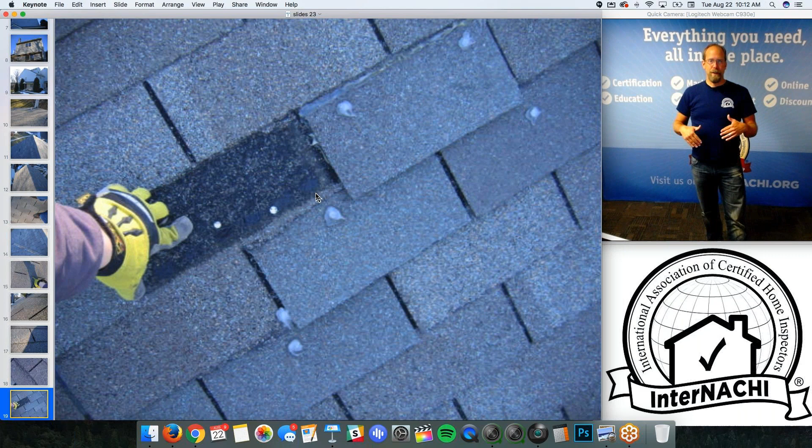As you can see, we have defects. They're not material defects. There are a couple shingles that are in poor shape, but you need a professional, so those are major defects. I'm looking for defects, and I want to make sure my client understands the degree of the defect. Material is the worst, major needs a professional, minor needs a professional or maybe you could do it, and cosmetic is like a blemish.

These are major defects, and the shingles weren't even installed correctly. As you can see in that shingle, one of those fasteners was installed poorly, they're not spaced appropriately. That's not where you install a fastener. You don't install fasteners 4 inches apart on any shingle, not even wind driven. And that fastener is installed in the adhesive strip, so that's a poor location of a fastener in a 3-tab asphalt shingle.

I like to communicate with pictures and video more than words. If you take a look at my inspection reports, you can download samples of them. My reports have a ton of pictures, because a picture is worth 1,000 words.

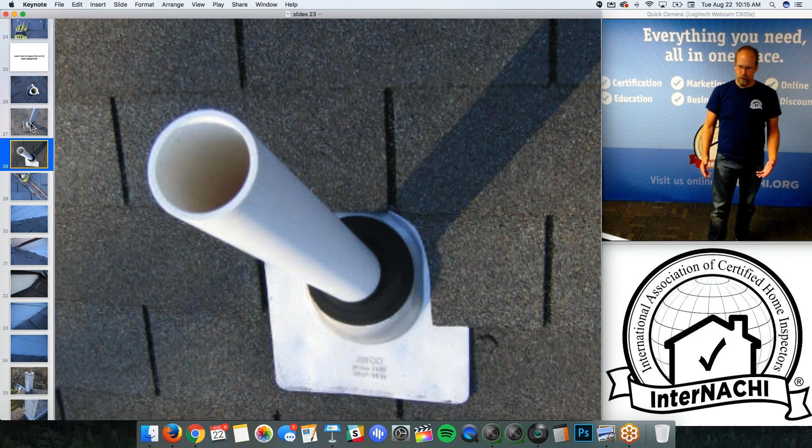So there's the penetrations, that flashing is not installed properly. If you take a look at it, the left side of the flashing jack is actually open to water penetration. There's a hole 2.5, 3 inches from that left edge of the metal flashing. Oh, I wonder if I have a pen. I've practiced this before, but usually I'm not very good at it. There it is, cool. So right there is where I'm talking about. There should be an asphalt shingle tab lying over that area, so it's not a really great position from the roofer on that flashing.

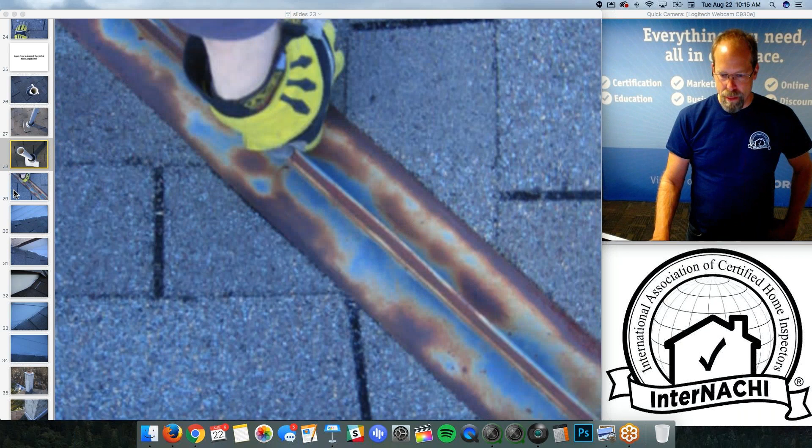The standing seam has a little bit of corrosion. I'm not worried about it.

The other type of flashing that you need to look at is flashing around the vent pipes, valley flashing, and step flashing. Step flashing is listed in the standards of practice, and you're required to inspect for it. I see step flashing, but I also see white silicone slobbered all over it. And when I see that, poor workmanship, something sloppy, I put a smile on my face. I know I've got a problem, and I want to figure it out as much as I can. I'm not required to diagnose every problem I see, but I'm going to try to figure out what's going on, because this doesn't look right.

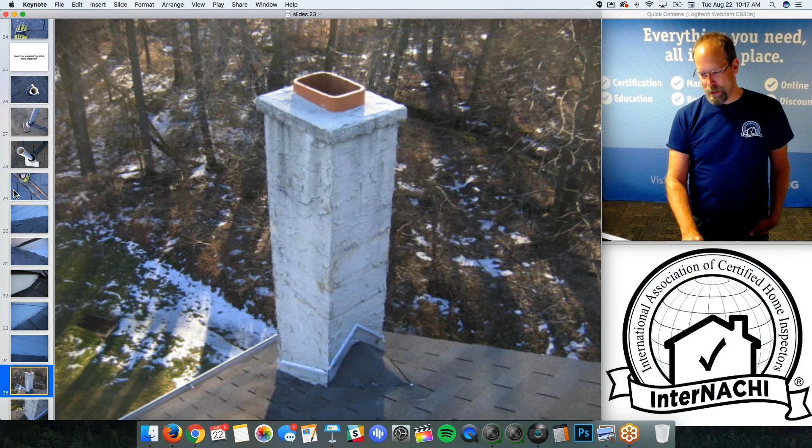So you can see the metal flashing there in between the shingle tabs, but I don't know why. If you do metal flashing properly, you don't need sealant at all. So you're probably saying, well, what about masonry? You're supposed to cut a groove into the brick masonry fireplace and bend that flashing in there and shove it in. Then you can put a little tab of silicone if you wanted to, but silicone is a temporary Band-Aid, and those things fall off all the time. So does silicone.

There's the chimney stack. You're required to inspect a chimney stack. We have a course on inspecting fireplaces and chimney stacks. I know that's a fireplace chimney stack. Can anybody take a guess why I think that's a fireplace chimney stack and not a masonry chimney stack from a fuel burning appliance, furnace, or boiler?

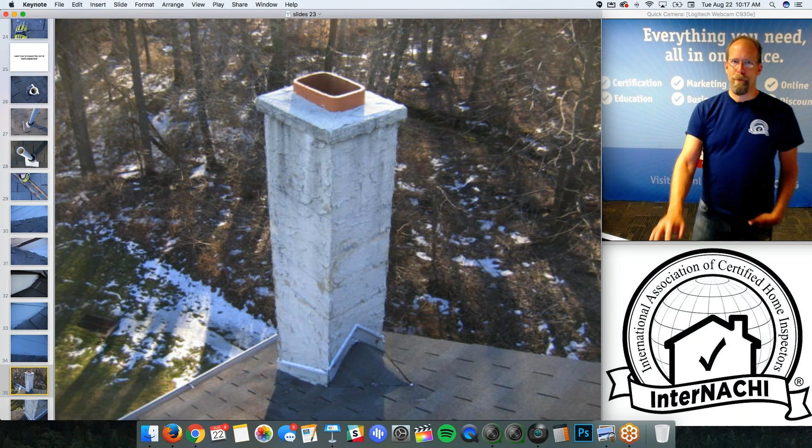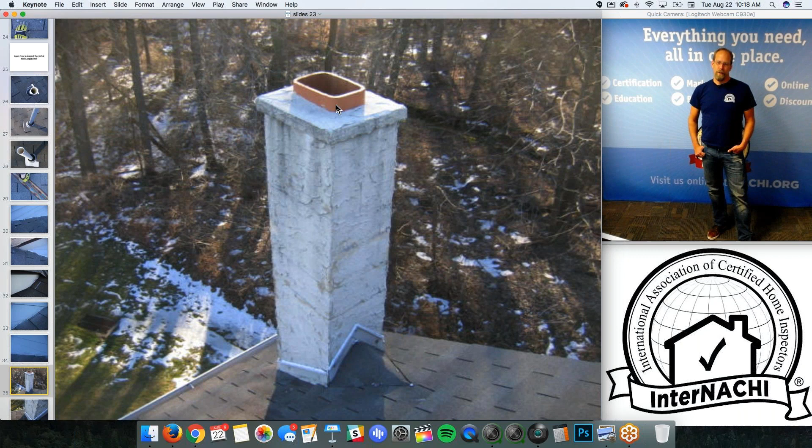Anybody guessing? Shelly says it's over 3 feet high - no. Ceramic vent? Yeah, you're close. Douglas - so the shape, it's actually the shape of the interior flue liner. The terracotta flue liner is rectangular, and that gives me a pretty good guess that this is a fireplace chimney stack, just the shape of it. If you see a rectangular flue liner on a chimney stack, it could be a fireplace. This is cold climate, so that makes sense. If it's circular or square, that could likely be a flue liner for a fuel burning appliance, a furnace, a heating system. Just one of those tricks - it's in the course as well.

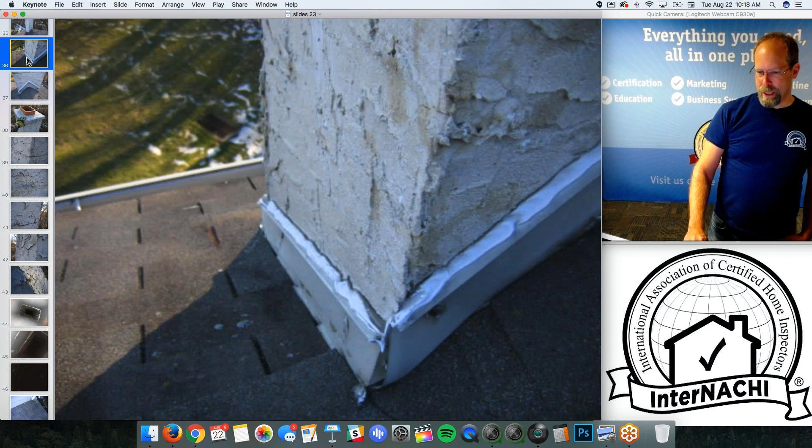The flashing is okay, but I'm not happy again with the white silicone - doesn't even look very good. The wash or top cap on the chimney should be sloped. If it's metal, it should be sloped with a drip edge to kick water away. There's some cracking of the masonry at the top wash, the crown, and also cracking at the mortar joints. I'm assuming this isn't brick because the cracks are about 8 to 9 inches apart, so this is probably a concrete block chimney stack, with cracks at the mortar joints and efflorescence at each crack.

There's also chunks of masonry popping out. What happens is this masonry is absorbing moisture through the cracks or through the material itself, and through water pressure, it's cracking the masonry on the outer surface - or because of the cold climate, it could be freezing and cracking. Either way, it's a clear indication of water penetration into the material, with efflorescence or salt deposits being left behind and causing structural damage. So this is a major defect.

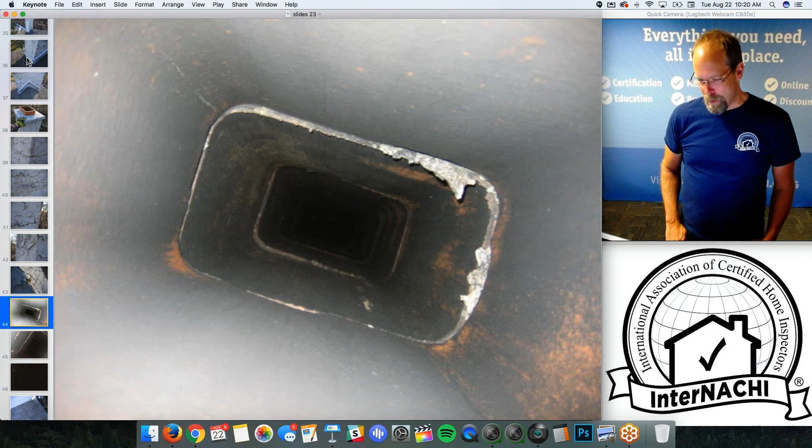The interior flue liner - you're not required, according to the standards of practice, to inspect any interior flue liner. But while I'm there, I can just reach up, grab my digital camera, and snap a shot. Often I find a hole right on the side of the interior flue, or maybe there's a separation or a vertical crack or a blockage. This one's fairly clean, I don't even see any soot or creosote. And I try to zoom down to look at the damper or the throat of the fireplace.

So what I did was I took a bunch of pictures of the roof, usually about 50 pictures just of the roof. If there's a lot of defects, a lot more pictures. For this roof, we had some major problems - some shingles are cracking, and issues in the chimney stack and the flashing. So I'm taking about 50 pictures, I'll put maybe a dozen or so of them in the inspection report. I won't be able to put them all in.

I'll also do video. I used to carry two cameras - now I have software that I use with my iPhone. It takes pictures and video. I would take video of the roof inspection because I don't want anybody coming up on the roof, but I wanted to communicate my findings really well. So I would take video, and here's video of the roof.

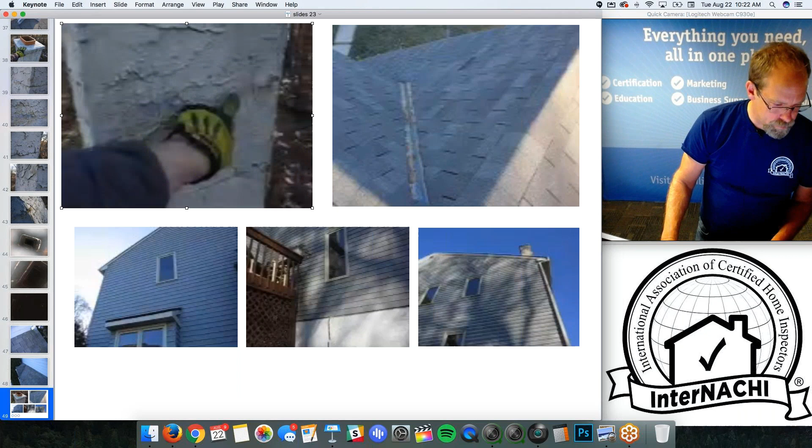There's the chimney stack - the masonry chimney stack needs some repair at the mortar joints. The stucco exterior, cement stucco, is cracking along all of the mortar joints. That could allow water penetration.

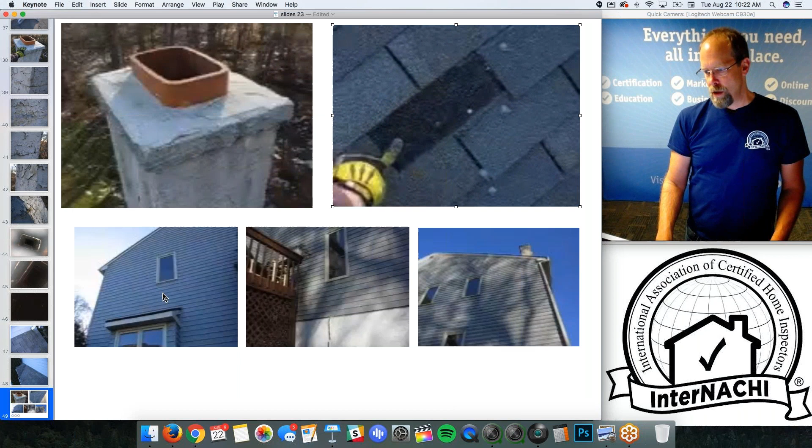The asphalt shingles need to be repaired in several areas where they are actually missing. Looks like there's some water damage over there on the exterior. There's a hole in the siding up there.

I took videos of my inspection as well. At the end of the inspection, about two and a half hours later, I'd be in the kitchen. That's where I wind things up, get paid, and summarize everything and my findings. What I did was turn my computer around and play those videos for my client, particularly when their agent was right behind them. I would just play them and let them view the videos.

After a few seconds, they realize that's their roof. They're not watching just any video, it's their video of their roof that they didn't get to see, because I don't take anybody up on the roof. That was part of my brand.

So I did a ton of pictures. I gave all of my pictures to my clients, and I did video and provided all those videos to my clients as well. Used to burn them to a DVD back then, and then USB. Now it's all in the cloud with your mobile software. So you have to think about that as well.

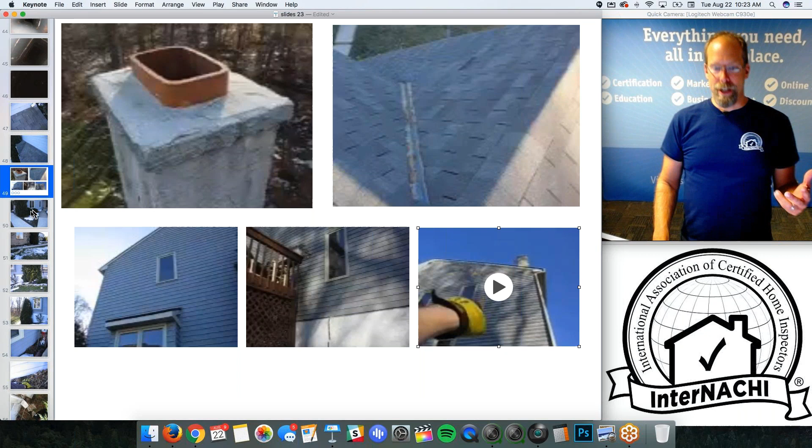I think digital pictures were kind of new about 15 years ago. Well, I think video is the same way. In about 10 years from now, people are going to expect a lot more video. In fact, I love the idea of a video-based inspection report.

If you've been with me during an inspection or in other classes on software, you can see that as well. It's so easy to snap pictures, and it's just as easy to do video.

So I'm done with the roof, right? I'm using my mobile device. I've entered my comments just by clicking and tapping the sentences that I like. And maybe there's some custom things I need to write in, like where the missing shingles are or how many. And then I'm done with my video as well.

As I write my inspection reports and take pictures, those pictures and video end up right where I was in my software. So if I was writing about the step flashing being gooped with silicone, in my software I would take pictures as well.

And then I'm done with that inspection report. I can print it out later, email it, put it in the cloud, PDF it. But I'm done with that inspection. Before I step on my ladder to get down from the roof, I'm done inspecting, taking pictures, taking video of the roof, and writing my inspection report for that system.

And I'm on to the next system, which is exterior. I do the same thing every inspection. I start with the roof. Why? Because it's the most difficult, and it's the one area that I can go and I don't need anybody's permission to be there, right?

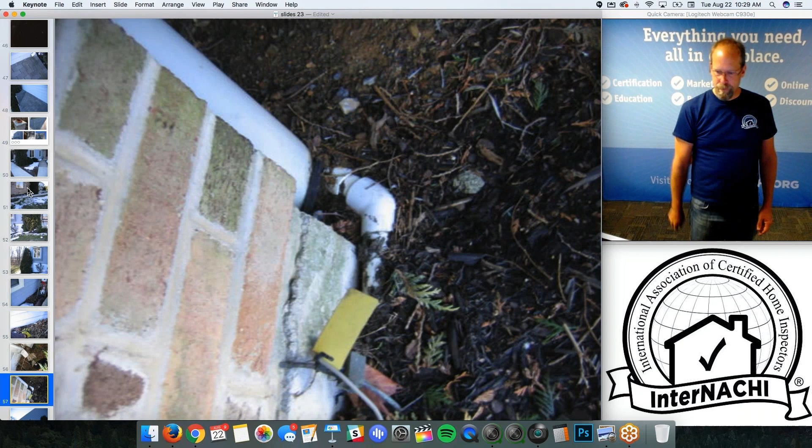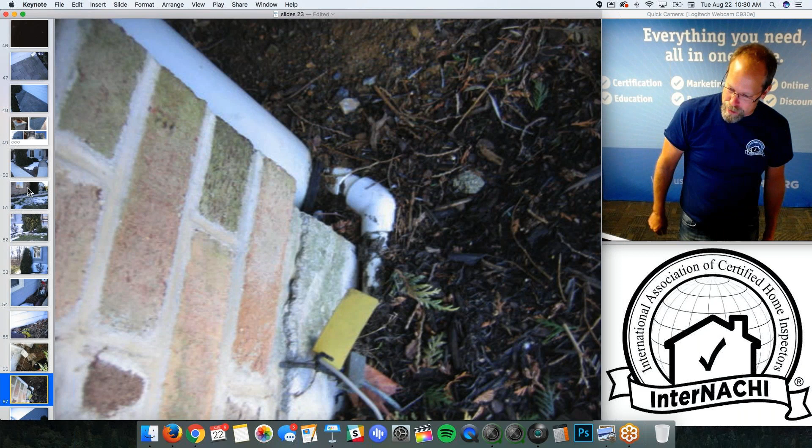When you're looking closely, remember far back? Then I move in closer, and then really close, up to the point where I'm touching things. And when you do that, you get to look at details like that — that's a pipe, about a 1.5-inch diameter, going into the downspout, underground drainage pipes. That's probably a sump pump discharge, I'm thinking, or maybe a condensate discharge. Something is discharging, so I'm going to keep that in mind as well.

And I'm looking at the exterior. Looks okay, for a 15-, 20-year-old home, not bad. The siding looks pretty good. There are areas of wood rot, though, on windows that I can see, and I'll put that in the report.

How do I know that? Why do I want to know about carpenter bees and birds, about the birds and the bees? It's because those two things can damage wood, right? So anything that damages wood, I want to know about.

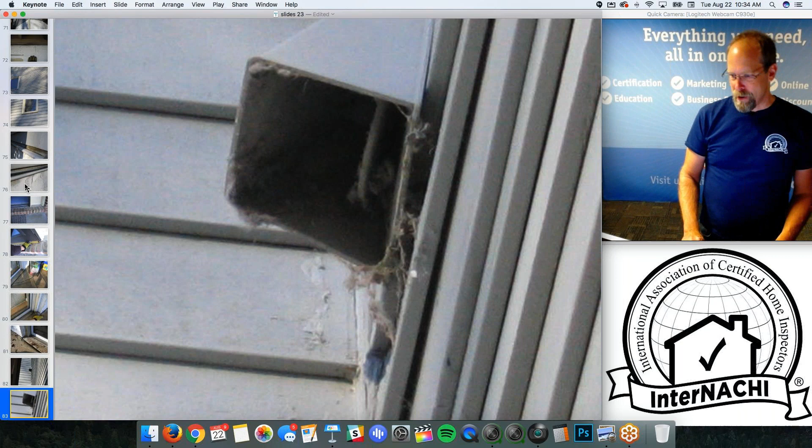Far back, mid, and then really up close—I take a picture of anything I inspect up close, anything at all, so I snap at just about everything. Those pictures with my hand in them usually remind me this is a defect. Here's one: the dryer exhaust with a ton of lint, and it's not even closing. Often a bird will come and go right into the dryer vent and build a nest right in there.

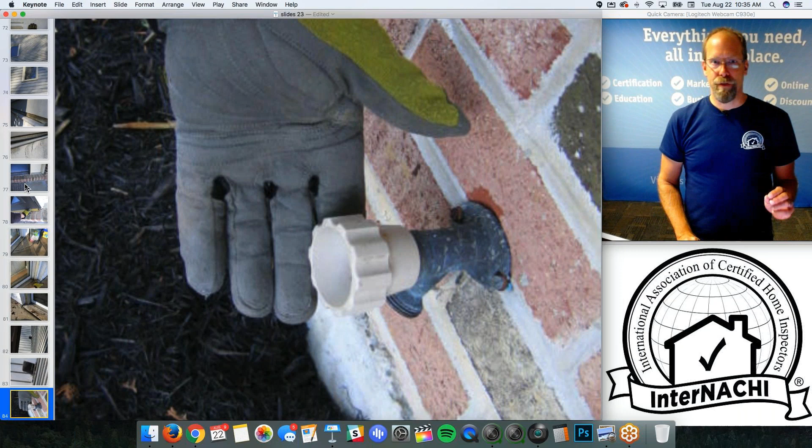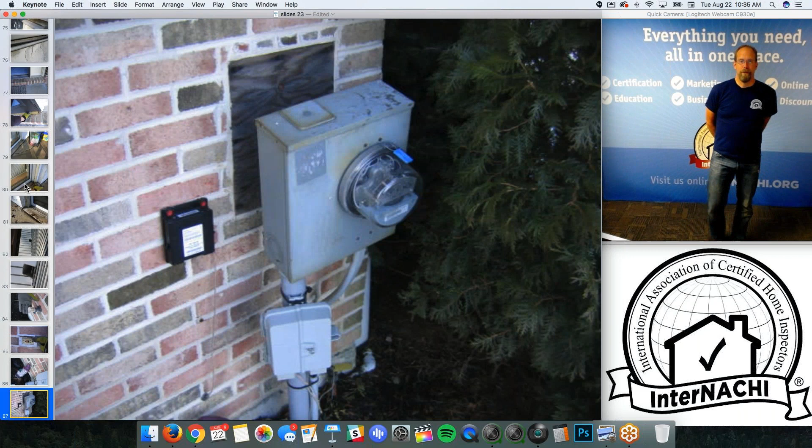Every exterior water faucet, especially in a cold climate, should be frost-free so it doesn't freeze and burst. Every receptacle outside should be GFCI protected. And speaking of electrical, while I'm doing the exterior, remember a house is a system of interdependent parts—one part affects a lot of others. So while I'm inspecting the exterior, here's another system that comes up.

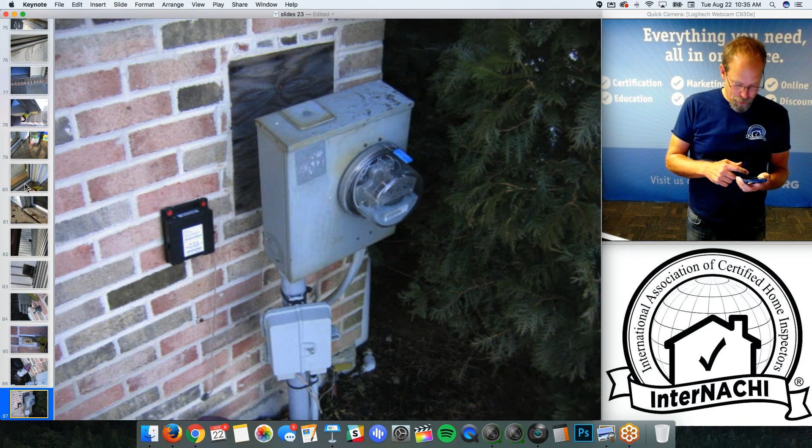No big deal, because I use mobile software. With a flick of the finger, I go from exterior to electrical. Now I'm organizing my software according to my inspection process. I know typically on every home inspection I'm outside doing the exterior first, then I flip to the electrical system, and the first thing I want to comment on is the meter, and or the main service line coming in.

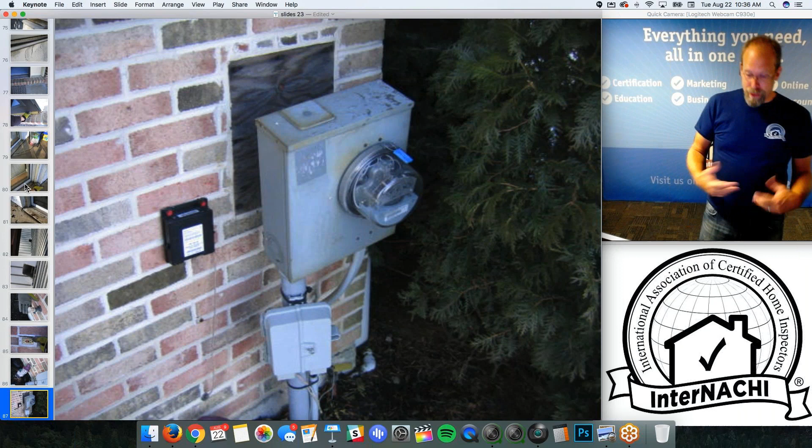The service entrance cable runs through an underground conduit, and it pulled on the meter as the ground surrounding the house settled. It pulled on that underground line and pulled the meter right off the house. This is a material defect. I touched this meter because I knew it was okay, but I'm not going to say it's all fine—I'm going to label it a material defect, because now we need to shut off all the power, reattach the meter box, and you'll need an electrician, maybe two, to do this. It's highly dangerous; this is not a homeowner task. With anything in the electrical system, I don't pull any punches—I want to make sure this house is safe. So this is a big defect.

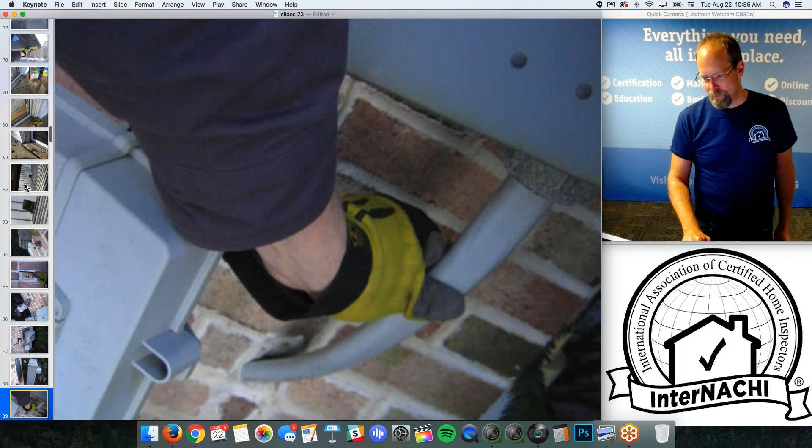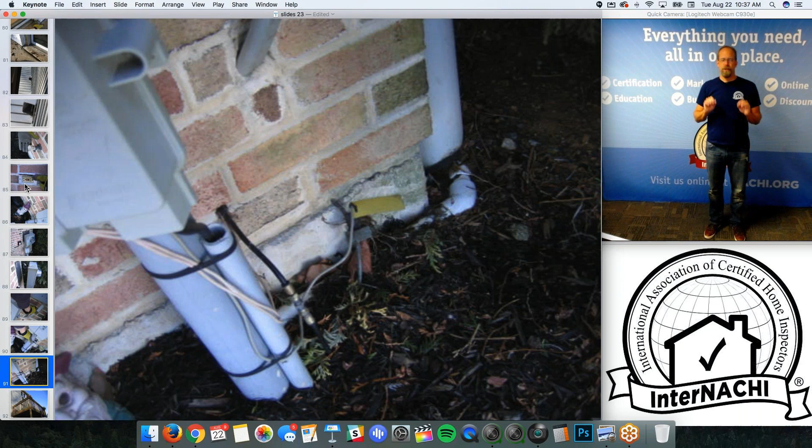There's a line going into the meter and the main panel in the basement, 200 amps. There's an underground conduit, which settled. We've got phone and cable lines—some sealant is needed. I see a grounding wire, a grounding rod, and I'm done with that. So that was probably a two-minute inspection of the exterior electrical system—a minute maybe. It's very easy.

I'm paying attention also to my time while I'm performing an inspection, and that should only take a few minutes.

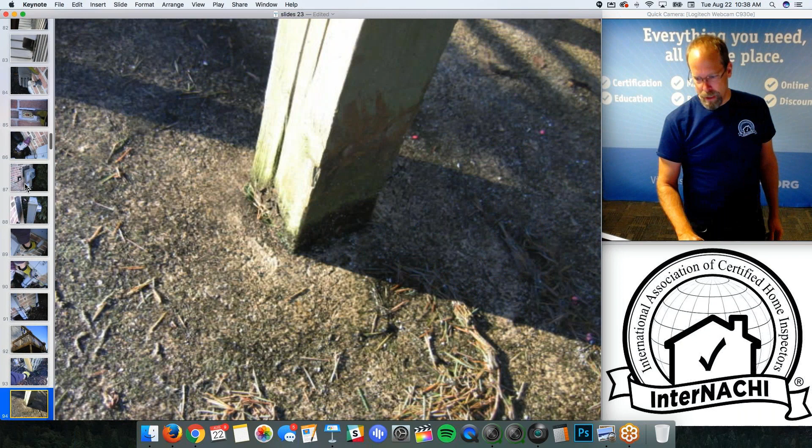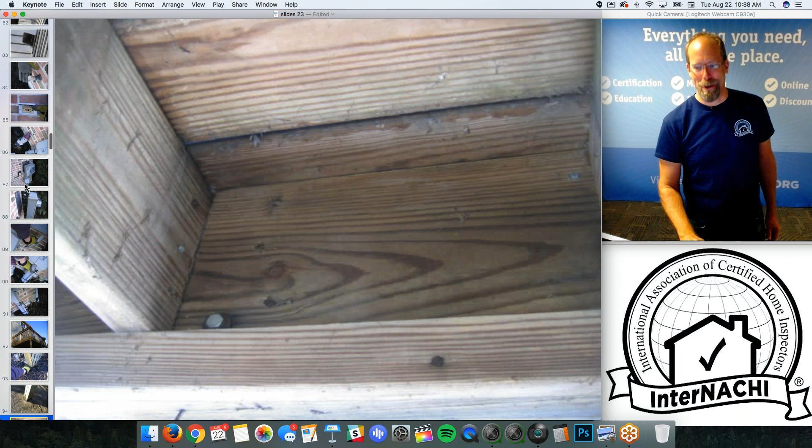The way I inspect it is from bottom up. I start from the bottom. Works perfect, I'm outside anyways, so let's poke with my screwdriver that I pull out of my tool pouch the very bottom of every load-bearing component of the deck system to look for attachment and damage. These are not attached and they're damaged. They're buried underground too. Now I'm looking for attachment to the house, and it's in poor condition as well.

You can't install a ledger board with nails. Why? Because they withdraw, they pull out. You can see a deck just pulling straight out. What you need is lag screws. Lag bolts, it's a lot better. Or designed attachment systems.

You go to Home Depot and you take a look, ask for the deck area, and you can see you've got joist hangers, fasteners, lag screws, lag bolts, but then there's the best, which is various amounts of different kinds of attachment devices to attach every joist to every ledger to every house structure. And that's the way I would build a house.

Here, we have a bunch of nails that can easily withdraw. A lot of them are rusting, a couple lag screws, small diameter heads. I bet they're not even penetrating anything of value. And there's a ledger strip. I'm not a fan of ledger strips. It's hard to attach a floor joist to a ledger strip. It's all about gravity, but decks tend to have a vector force going away from the house, not always straight down. So ledger strips are not my fan.

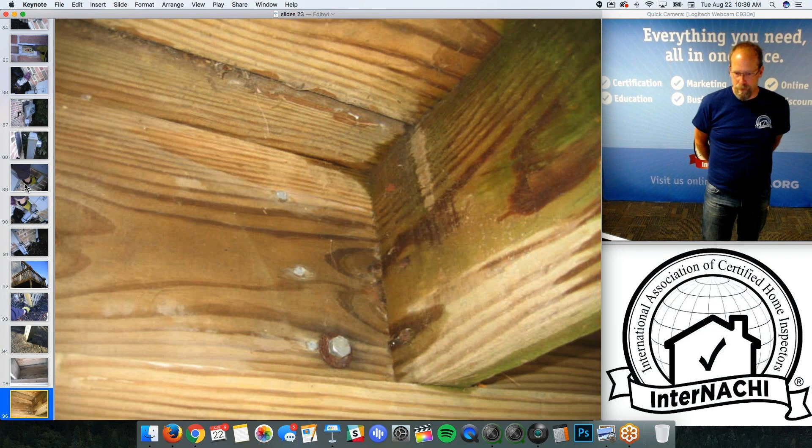But there is actually a minimum that a ledger strip needs to be, and it's violating that minimum right there. So let me use my tool. I gotta practice my pen. So right here, you need at least 1.5 inches of bearing. The floor joist end needs to bear about 1.5 inches on top of something. And so there's a ledger strip there, and it's barely attaching, barely resting on that ledger strip. So that's an indication of the condition of the entire system.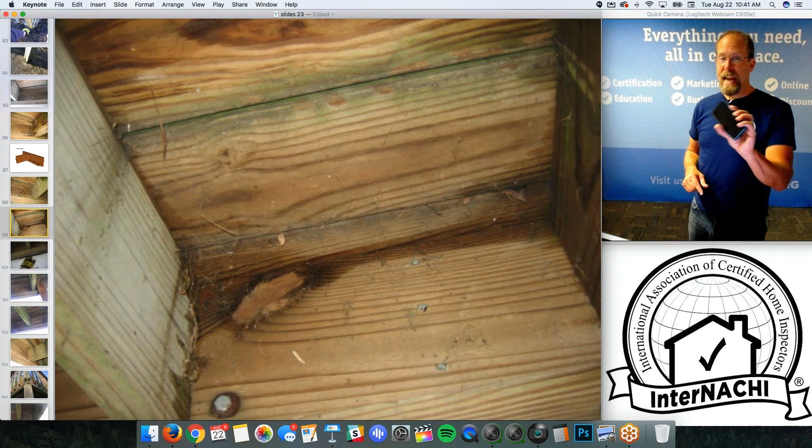So if you have a question, Phil, is there a specific report writing software you would recommend? Yep, all of the software that is available on our e-commerce partner site called inspectoroutlet.com, left-hand navigation menu, just click software. I recommend all those. I personally have Home Inspector Pro on my iPhone because it's a mobile device, and I recommend that everybody inspect with a mobile device, mobile software. And Home Inspector Pro works on any device. Another really good one is Home Gauge, and they work on PC devices and laptops and computers. So those two softwares I love.

Can we download these examples to our iPad or iPhone? Download examples, the software? Yeah, so every good software manufacturer has free trial downloads, and it's usually like 3 months, and you can play around with it and see how it compares to other things. So that's the first step I would do. Go to inspectoroutlet.com, download a free trial of one of the software and the things that are there for you.

For this deck, would you recommend none to walk on until this is fixed? Yeah. So this was a deck that I recommended because we'll get to it if I ever get there. There's water intrusion through the deck flashing that's visible from the basement. So I know water is actually traveling from the siding to the deck through the house structure and into the basement. Where there's a water path through wood, there typically is wood rot. I call this an imminent deck collapse caused by poor installation and workmanship, especially at the deck ledger attachment and flashing. And I recommended no one stand on the deck. And that doesn't go over very well with real estate agents, as you may imagine.

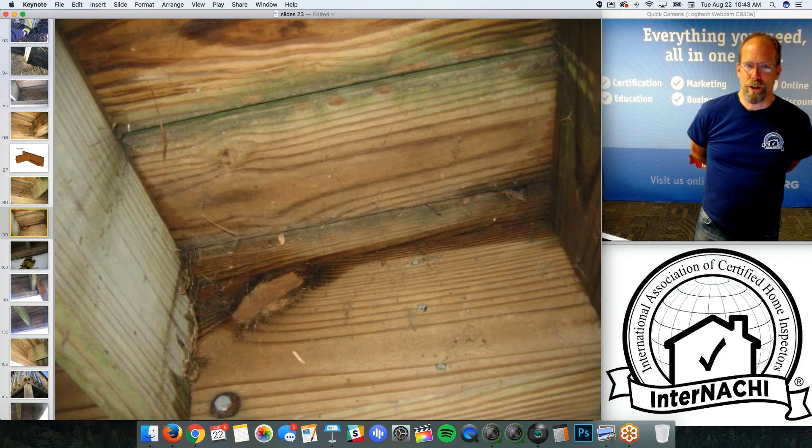I got to the point in my profession that I really didn't care. Right in the beginning, you tend to be pressured to say things in different ways and write it soft. That's fully understandable, and you have to negotiate that and stick to your guns as you become better at operating your business and becoming a veteran inspector and leading other inspectors. But you get to the point where you really don't care what anyone says, except for your client.

And you're always performing your inspection to the benefit of your client, so you don't pull any punches. So I really felt that this deck was not safe for anyone. I wouldn't let my family step on it, so I'm not letting anyone else step on it either. And you can see that there's a lot of wood rot.

I'm being observed today by James. James is in our room. He's watching me. I'm very nervous.

So you can see that there's been water going behind the deck ledger right here. So I'm still on the exterior, right? And now I'm underneath the deck, haven't even gotten up on the deck yet.

That's like wood rot — it's not wood rot. There's a term I used to use, it'll hit me, but it's like junk. It's like wood junk that comes from debris being carried by water behind a flashing, a siding, or a ledger board. It's like a dark, moldy kind of stuff. And it's an indication that there's been years of water going in areas where it really shouldn't be. That's a really great indication.

If you inspect with your hands, you tend to find things that other inspectors might pass over because they're just going too fast, right? So inspect with your hands all the time. I want to touch just about everything, that's why I wear gloves. You can see all my gloves wear out in a month at the fingers, because I'm touching everything, sliding my hand on everything. So that's another tip that I would do: inspect with your hands and then take a picture of it. If your hand isn't in the picture, you won't understand the scale. Your clients just won't understand what's going on. So your hand in the picture is a really good way of communicating.

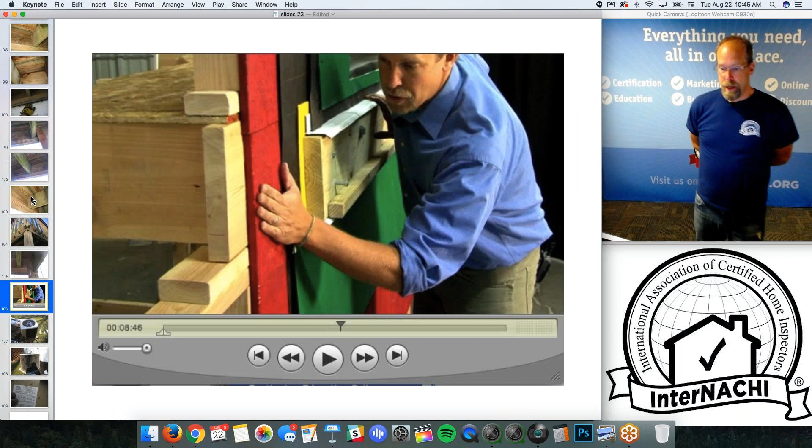A lot more problems with the deck. I did a deck flashing video, it's about 15 minutes, and as you can see I colored every component of a proper deck flashing. It's all about lapping in the right direction to divert water away — they need that water kicked out. So there's a really great video I would recommend, it's a short one too.

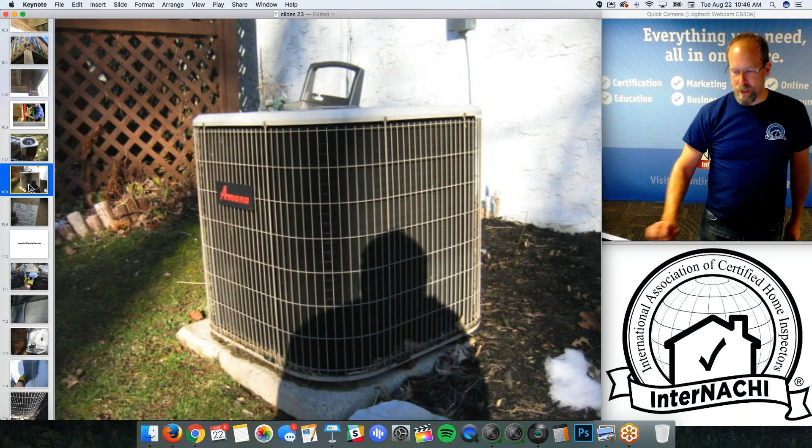On to the next system. I'm inspecting the exterior, but here comes what looks like an air conditioner unit. It's okay, I'm using a mobile device, I flick over — I don't have to put this all together eight hours from now, I'm doing it right now. I'm taking pictures and writing my comments. And this looks like a compressor unit, right?

So I can see the manufacturer — its manufacturing plate is there, the model number, the manufacturing number, and the serial number. Serial numbers are used to date it. Model numbers are used to size it.

And I like these folks, I've been referring to them — I don't even know them, just came across it. It's buildingcenter.org. I went there recently, and they're updating their entire website, so give them a chance to update everything. But it's a fantastic resource. There are other resources too, like books, online books, and actual printed books that list every hot water tank source and every furnace and air conditioner by the model number and/or serial number, and they give the date of manufacturing. So if you're really into figuring out how old the system is, go to buildingcenter.org.

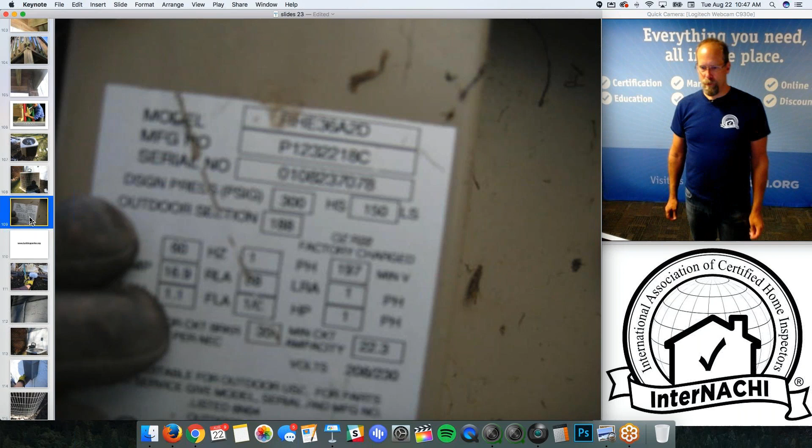You look for Amana, right, because that's the manufacturer's name. And then you type in the serial number and you get the actual date that unit was manufactured, down to the week, month, year. So that is far exceeding the standards of practice, but I often did it for clients who actually requested it. So if you wanted to really know the actual age of the system, I tried to find that out for you. But usually I told my clients, within my contract and in my inspection reports, that I'm just guessing the year.

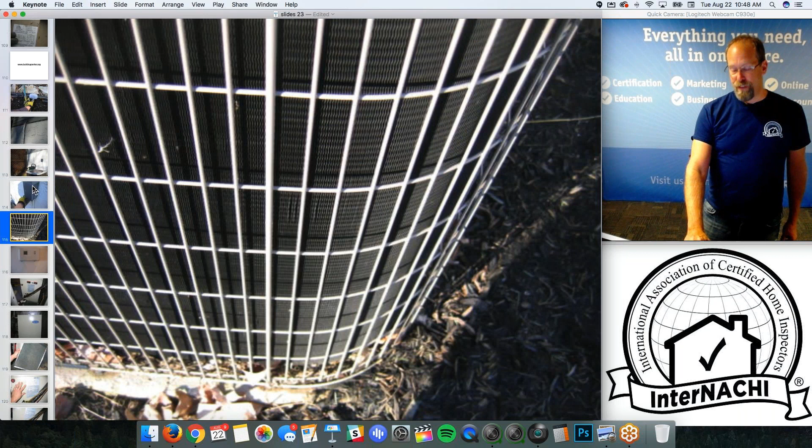So there's the refrigerant line going from the compressor to the air handler on the inside. Electrical shutoff switch is in sight, that's good. And the fins of the coil are good. And that's it, I'm done. That was a couple minutes of inspecting.

Now I'm inside and I'm doing the heating system. My client is ideally with me. If they're not, I'll circle back and take them through it. I want them to know how the furnace works.

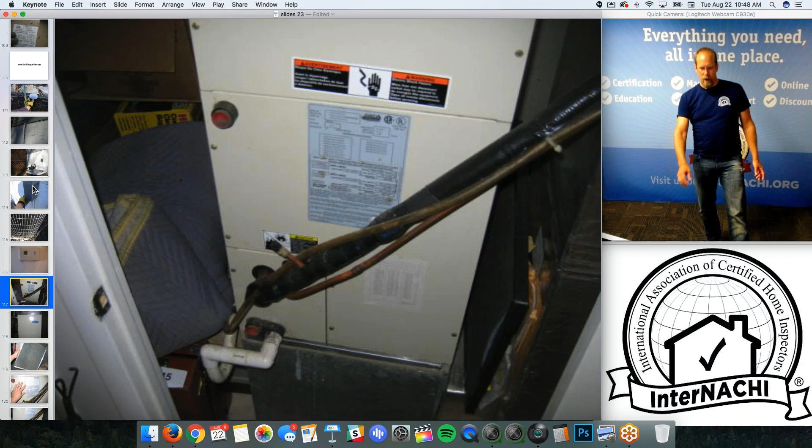And it turns out this is a furnace. No, it's not an air conditioner, it's a heat pump. Oh, I knew that because of that. Does anybody know what that is? And why? What is the clear indication that this is a heat pump?

While you're answering, Rob asks, can you comment on using a drone to inspect the roof?

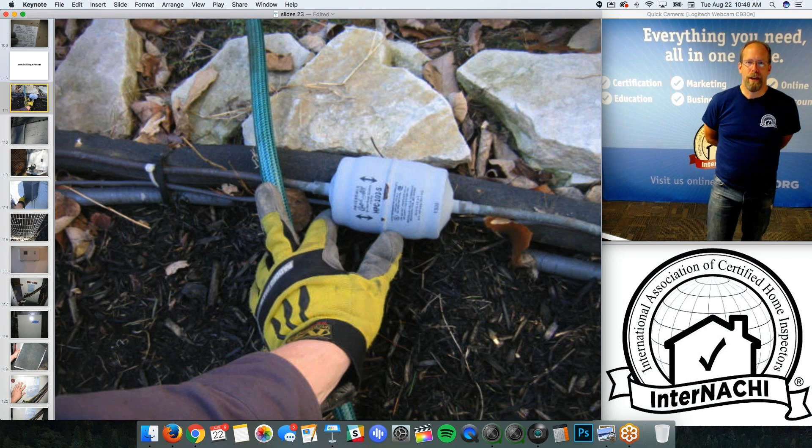Yeah, no, don't do it. Drones are for fun, there's just so much liability, I don't recommend it. The reason is, well, I live in Colorado, and around here you can get a gust of wind of 30 miles an hour without you knowing it. Totally unexpected, and that'll take your drone into someone else's house, or into a tree. So that just doesn't work where I live. I was in Florida flying drones too, and it doesn't work down there either. A nice calm breeze of 5 to 7 miles an hour is too much for me to handle with the drone. It has to be absolutely perfect weather. It can't be raining either, right? And cold weather affects the batteries as well. So these things are really just for fun. The FAA also regulates drones. If you start flying drones around, near an airport especially, watch out if you're not certified and registered with the federal government. There's just too much going on. I can't see how you could beat me with a drone in the market during an inspection. I'll find more problems than you because I'm going to get up on the roof. And if I can't walk on the roof, I'm going to get up to the gutter edge with my ladder, or I'm going to use an inspectoscope. I have no risk of damaging someone else's property with a drone, with those blades. So I would say drones are for fun, and you can do a better job consistently in any condition just by using your feet and your hands and your cameras.

What about Inspect It? I've heard of that software.

I haven't heard anything terrible, so I don't know much about that software really. I just know what I know, which is Home Inspector Pro and Home Gauge. Pretty good stuff.

Tom says, I was taught to have the ledger attachment off from the house so water couldn't drain past it. I'm not sure what you're asking for. I'm not sure, Tom, what you're saying, but you can ask again.

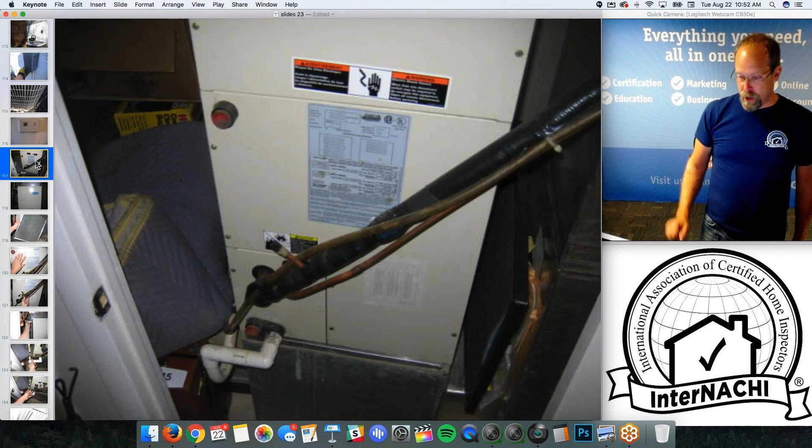So let's see, going back to where we were, there's the heat pump unit there. Refrigerant line coming in, a condensate line at the bottom, and it looks like there's the electric coil, an electric supply line, and the coil and the heating system.

Sometimes I'll pull out my 6-in-1 screwdriver set, pull out the Phillips, and take the screws out. I love seeing that coil if I can. So I'll pull the cover off and look inside to see if I can see the coil and maybe take a picture of it. I also like to see the evaporator coil tray, sometimes those trays are just filled with gunk and corroding away. The air filter is low efficiency, poor quality, washable, and dirty.

There's the manufacturing plate, the refrigerant lines, the electric lines, condensate tube discharge from the sump pump, and then the basement is conditioned somewhat. It wasn't designed originally for that. Someone just added some ductwork and some ceiling tiles in the basement and some finished stuff. So that's the heat pump system in about 10 minutes.

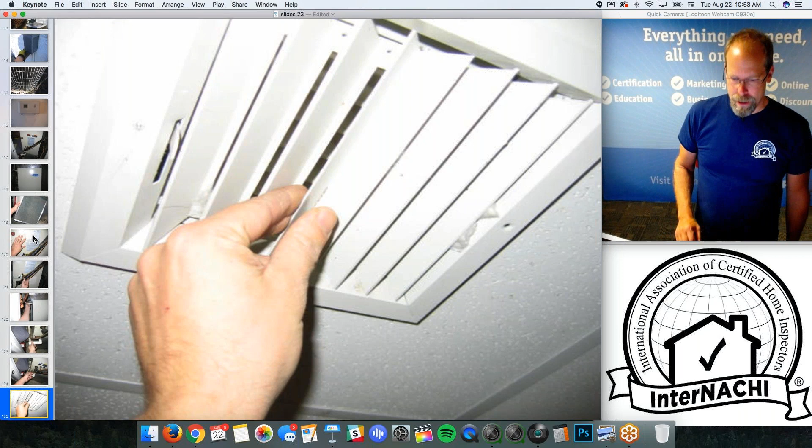Some areas, like Texas, require you to measure the actual delta T, the temperature of the air coming into the unit and the temperature coming out. It needs to drop or be different, it needs to heat up or cool off.

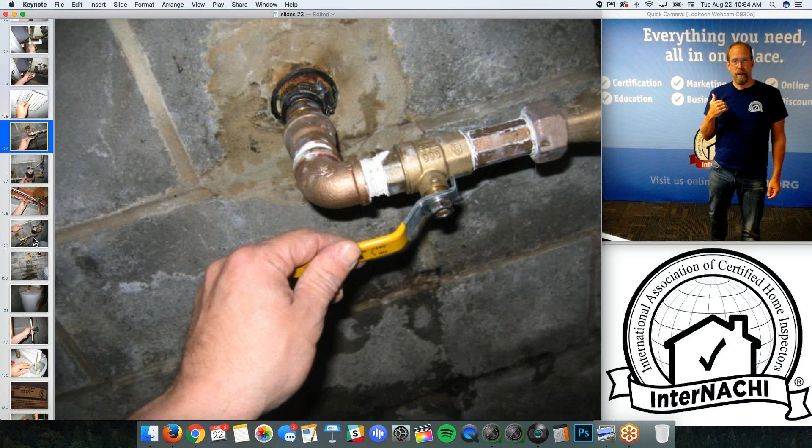Now I'm into the main water coming in. I think of water supply, either a private well or public line. This is public water, with the shutoff valve, water meter, and distribution pipes going to the hot water source. I'm also thinking about the next system, the drainage going out, the sewer waste drain stuff. Water coming in, water coming out.

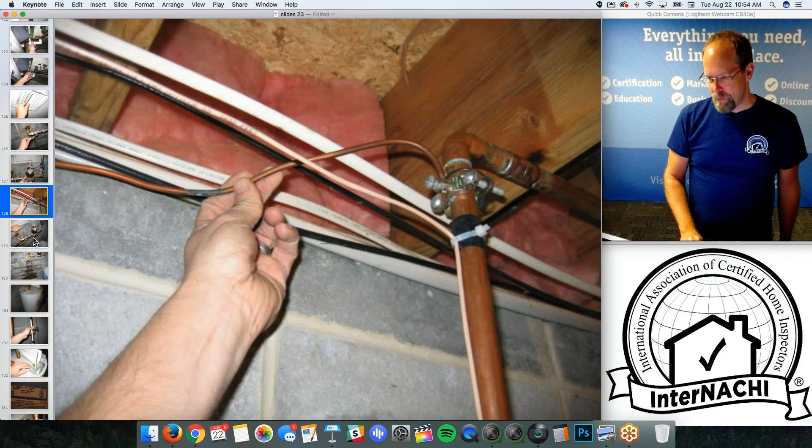And there's the water meter, the bonding wire. There isn't a jumper cable, there's supposed to be like a grounding wire, a jumper wire, clamped on either side of the water meter.

And while I'm there, I see water penetration, obviously. Those are CMUs, concrete masonry units, concrete blocks. They're porous, they're like sponges, and they're very easy to use. I've built homes using them, but if you don't waterproof the exterior of the foundation, you're going to get water intrusion here. So there's active, wet water intrusion coming through the foundation wall in certain areas, including below the main water.

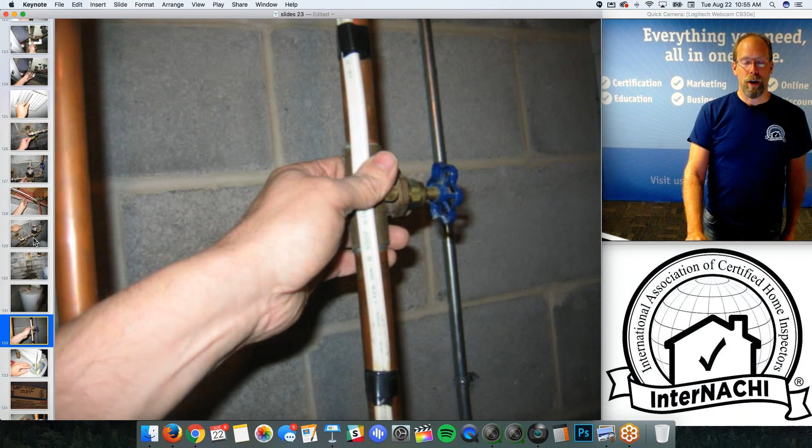Hot water source, electric hot water tank, cold water coming in with a shutoff valve. That's electric, I like to look at the wiring, make sure it's grounded. There's the manufacturing plate, maybe I can get a date, at least the size. Discharge from the TPR valve extended to the floor. Done.

Electric system. Here's the electric main distribution panel, main shutoff switch at the top. I'm going to use my fingers to designate if it's 100 or 200, it has to be at least 100 or 150. And I want to make sure that the labeling is full. Can't tell if it's accurate.

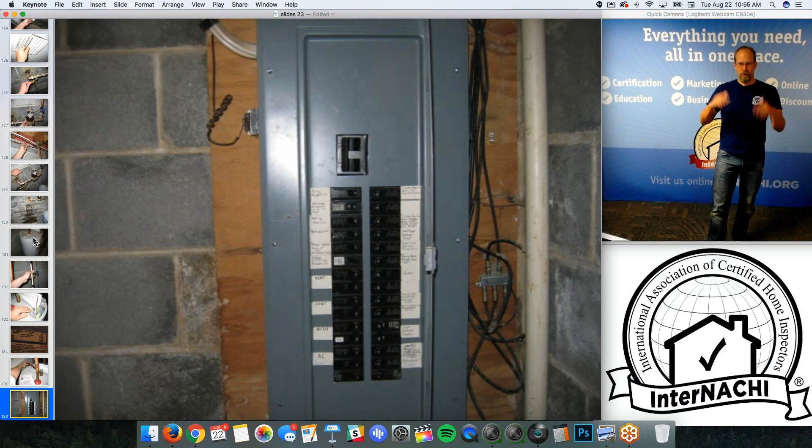I'm not going to switch all the breakers and make sure everything's accurate, but I'm going to make sure that every breaker is specifically identified. And I don't have to take the cover off, you're not required to remove the dead front cover, but if you do, that's what it looks like.

I do not recommend you do that. Don't exceed the standards of practice in this way if you're not trained to do so. You need gloves, you need to be standing in a safe area, you need clearance, safety goggles, not really concentrated on preventing high arc flashes, but there could be an arc, a spark. So I don't recommend it, but I always did.

I did this, I exceeded the standards of practice for every client. And often when I did, I got to see defects that I wouldn't normally be able to see.

And that's a double tap, and it's the basement circuit. So the house was originally built with an unfinished basement. They finished the basement, someone put some wiring in and stuck a wire into a breaker, a 15 amp breaker. It's probably not supposed to be there, and there's no building permit either, and there's no electrical inspection sticker as well.

I'm looking for overfusing, where you have a big breaker on a small wire. I'm looking for anything that's melted. I'm looking for water intrusion, looking for debris, looking for spray paint, anything cracked or damaged. I'm looking for grounding and bonding and connections. It all looks pretty good.

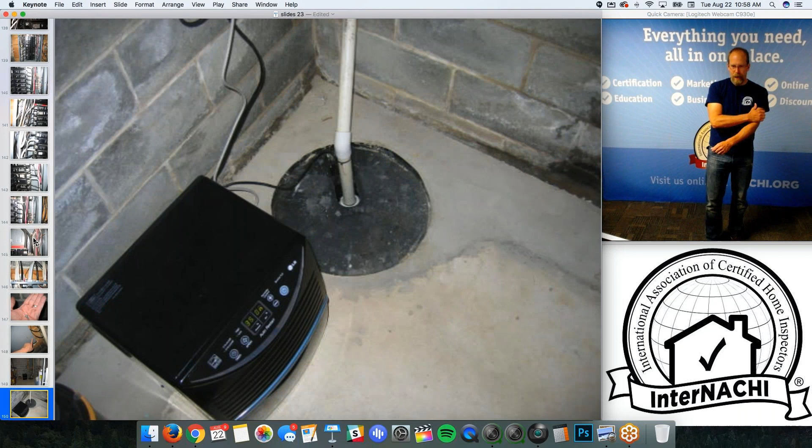There is a great picture that tells a lot about this house. Originally, the house didn't have a drainage system or sump pump. You can tell that because of the different colors of concrete in the floor. The sump pump was installed afterwards, and there's a drainage system that was installed in the perimeter of the basement afterwards. And there's a dehumidifier right next to the sump pump, and it's on and it's draining into the sump pump.

So not only do I have a concern in the past about water intrusion, because they installed a perimeter drainage system with a sump pump, but I actually have active water penetration, and there's water in the trench and in the sump pump itself. And I know that system is not collecting all the water well because we have high humidity in the basement. So there could be water intrusion maybe behind finished walls that we can't see, and there's high humidity levels, and they have a dehumidifier actively running in the basement. It's a great picture, I love this stuff.

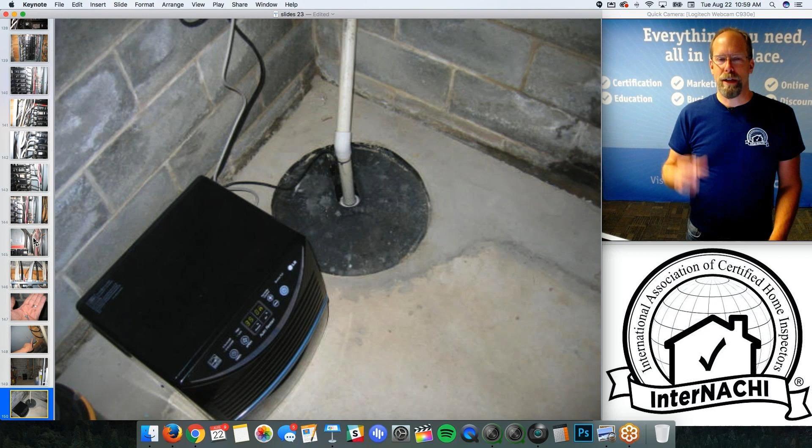If this is a home inspection and the sellers are going to move, they'll probably take that dehumidifier, right? If my client wasn't there or we didn't do a home inspection, my client may move in not realizing the water issues in the basement because the dehumidifier isn't there. So I want to make sure that dehumidifier, even though it's not a permanent fixture, is part of my report, because I want them to understand that even though I'm not required to measure the humidity levels, that's an indication that we have water intrusion problems in the basement.

If there's a sump pump with a manual float, I'll grab it and make sure it kicks on. There's a check valve on the discharge pipe, and we saw the discharge pipe outside, right? There's also standing water in the sump pump, and I want to mention that.

This is wintertime, by the way. I forgot to mention, you may have seen the snow outside. So we have water penetration in the wintertime, and there's snow outside, so it wasn't a rainstorm.

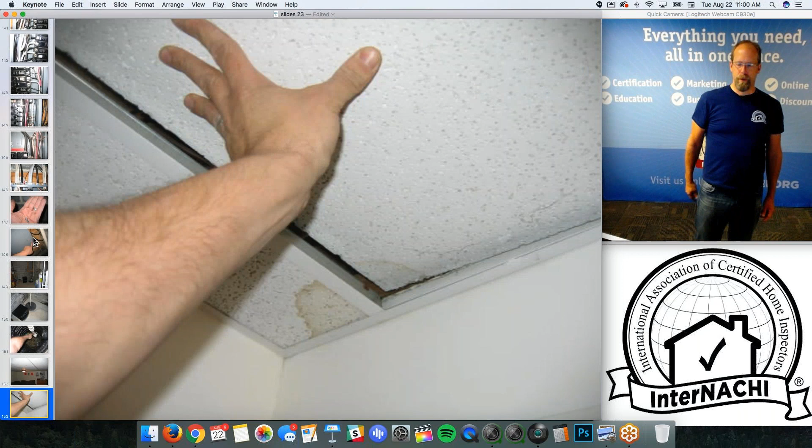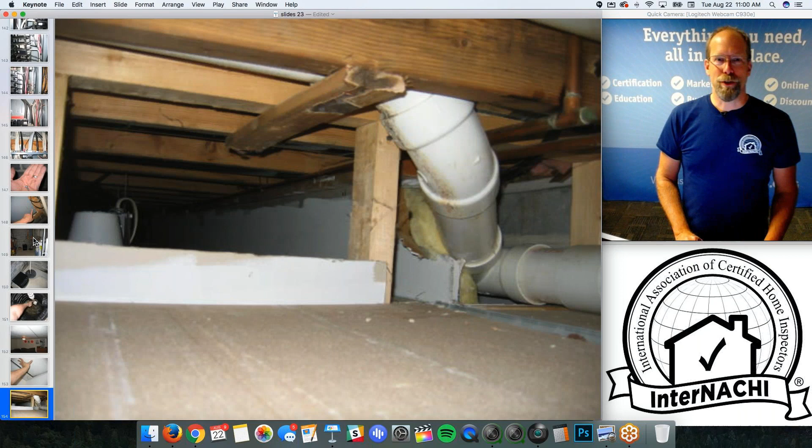You're not required to lift any ceiling tiles and look above or move insulation, but when I see a watermark on a ceiling tile, that's where I have a lot of fun. I move the ceiling tiles and inspect why there's a watermark, and it was from this water leak in the past. Something from that 4-inch sewer pipe was leaking and dripping on the ceiling tiles of the basement, and I want my client to know that.

And it's not wet now. I carry a moisture meter, and also an infrared camera. I used infrared on every inspection as well, just included it, to see things.

If you get really detailed, like I did, I opened and closed every door, not every window, but every door, just to make sure that they open and close and lock and unlock. And the closet door wasn't all that great.

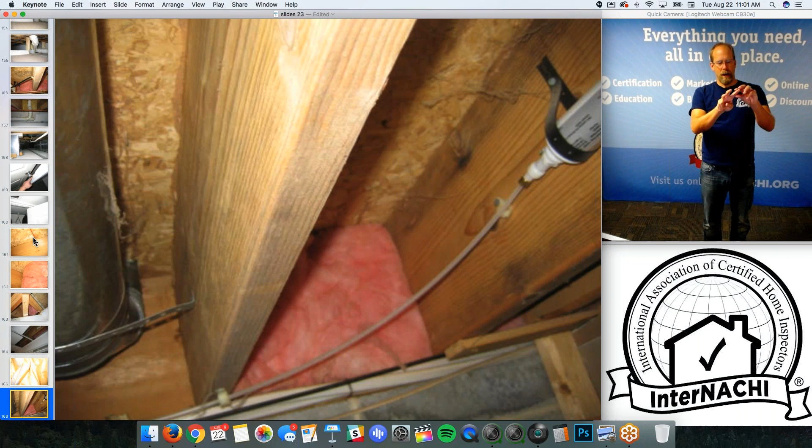I'm moving insulation in the ceiling of the basement, in between joists, along the band and rim joists, and in other areas. I use a gardening tool, a 3-tine hoe. One tine I bent straight, the other was kind of bent, and the other was really hooked. With those 3 combinations, I could do just about everything, move things around and put things back.

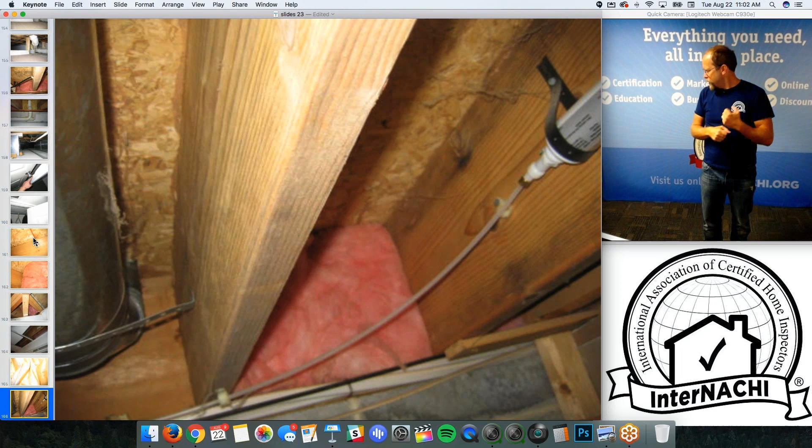And it was extendable. I should have it with me. It went from 2 feet to 4 feet, so I was able to collapse it and carry it, then open it up and really reach just about everywhere I wanted to.

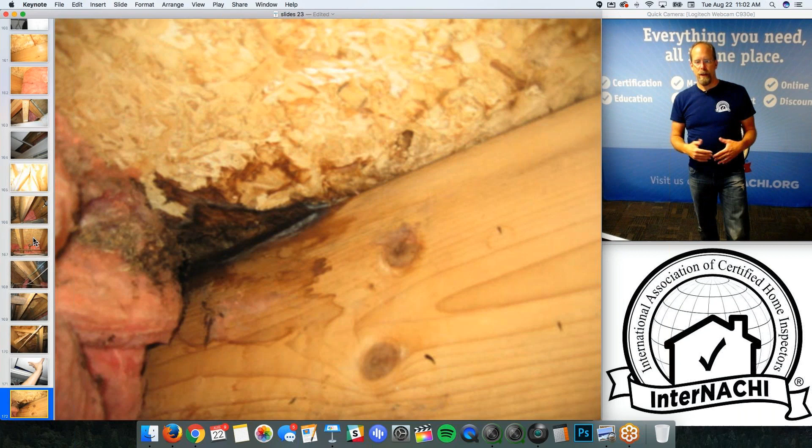Floor joists look great. Moving more ceiling tiles, and I finally get to the deck area, and there's the deck. This is the floor joist near the deck on the outside, missing flashing, water intrusion. It's just an indication that we have a major deck problem.

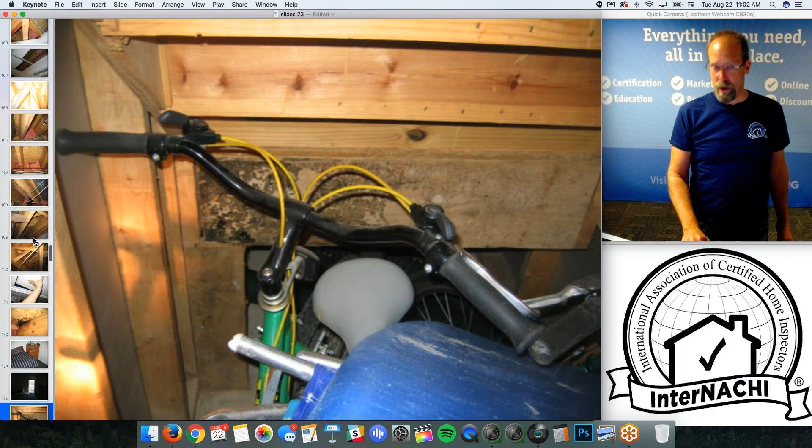I want to take pictures of the finished basement because I can't see everything. I'm not moving furniture, not lifting carpet, not moving personal items. We have water intrusion here and there. There might be mold behind that area, but I want to make sure my client knows that I can't see everything. There are inspection restrictions, which are reasonable to report, like that.

I would love to crawl underneath the stair landing, but I can't get there. Why? Because of that. All that stuff is in my way.

We also have a ton of fish tanks, a half a dozen fish tanks. I don't know what was going on. They're all empty, but it's another indication of a lot of humidity and moisture in the basement.

This is a tool they no longer make, kind of like my gardening tool. It's an extendable moisture meter with 2 prongs at the tip, and it gave an audible readout. It used to beep if it sensed moisture.

There's a clean out for the sewer. Tested the receptacles. There's the basement bathroom, toilet, sink, GFCI.

That's it, now I'm in the attic. So now in my head, I'm scheduling the rest of my day when I get into the attic. That's how I think, because I'm done with the major systems. What do we do? Roof, exterior, heating, cooling, hot water source, water coming in, water coming out, electrical, structure. And then I did a basement kind of thing where I looked around at the insulation and the water and the ceiling tiles and the bathroom downstairs.

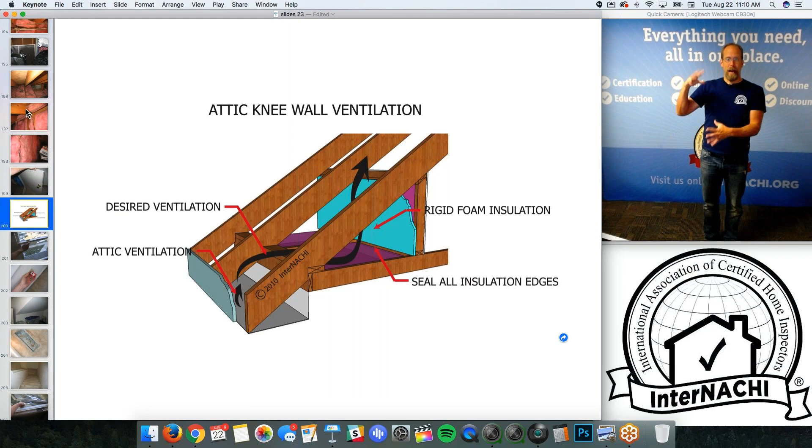So there's a finished part of the second floor that's going to an unfinished attic space. This is a cheap little attic access door. It's not insulated, it's not sealed, so it's leaking air. It's essentially like having an open window in the middle of winter. Imagine the middle of winter in a cold climate, snowing outside, and you just open a huge window and let it stay open 24 hours a day. That is the effect one of these doors can have on a house.

I inspect every window and door that I can reach. It's pretty easy, unless it's a huge house, like a 4,000 square foot house, then I'm doing a representative number. And when I come across something that's wrong, a tip is to just cross my fingers, like an X, and that means something's wrong. So that lock is damaged.

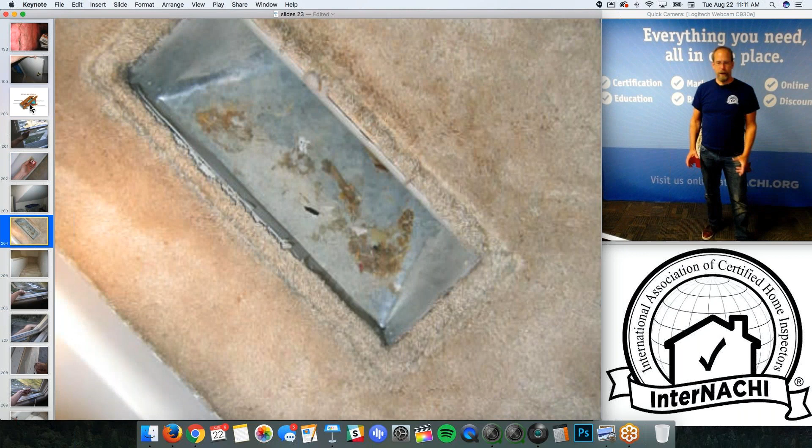When there's a furnace and ductwork on an existing home, I love to open up the floor register, stick my hand in there, and grab some stuff. I often find the original construction sawdust and nails that the folks just dumped into the ductwork, and the ductwork has never been cleaned. So I make that recommendation.

I look for handrails. Handrails should be grippable. Imagine you're a grandmother trying to navigate these steps without holding on to anything. Impossible.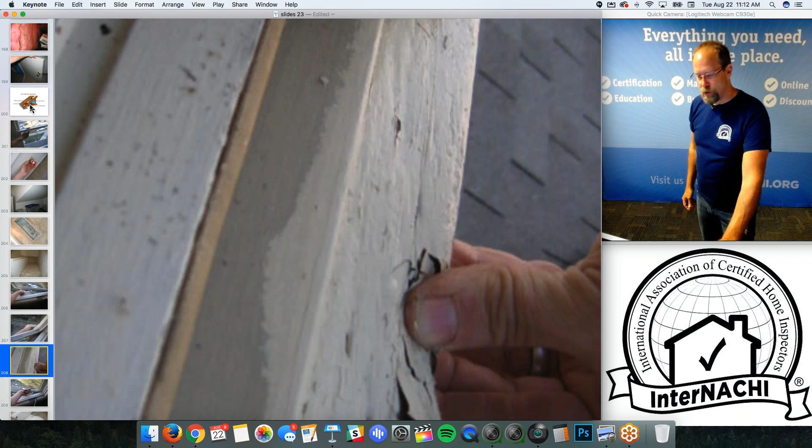Remember that window that I couldn't touch from the exterior? Well, I'm here now because I remembered where it was, and it's rotten. There's wood rot in my hand. A lot of people say, well, now you've got to buy that window because you just put a piece of it in your hand. Nope.

If I break something during a home inspection, guess what I do? I take a picture of it and put it in the report, because I'm expecting someone to congratulate me for finding that problem before they did.

Ever squeeze that soft brass, chrome-plated sink trap in a bathroom sink? I love squeezing those, they just crush. Well, first thing I do is take a picture of it and put it in the report. It's a good thing I found that.

Ever test a garage door and it falls apart, pops right off the rail? We've done that before too. It's a good thing I tested that garage door and it popped instead of having it fall on your head or on your Corvette, right?

So if you break something during your typical home inspection process, don't freak out. That's kind of your job. Your job is to find problems, things that are on the verge of breaking, things that are going to collapse. Sometimes they collapse right in front of you, sometimes they break in your hand. And that's your job.

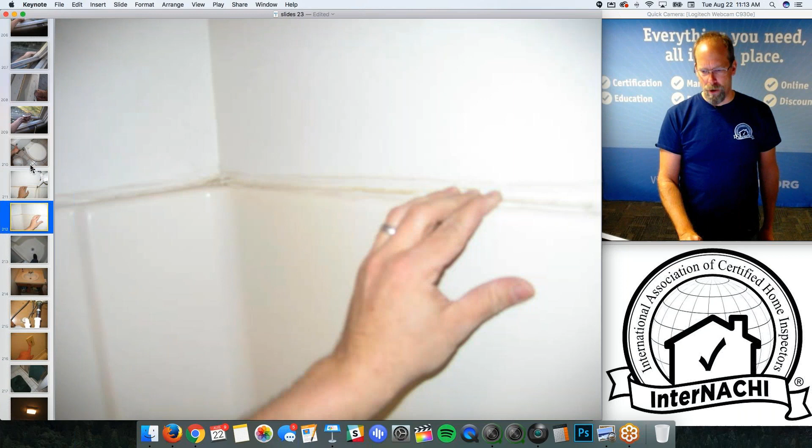Flush the toilets, run the sinks, the showers, look at the tile and the floor. Step especially in the plastic fiberglass shower surrounds. Sometimes the floor wasn't foamed up or supported really well, and it cracks underneath your feet. Those are kind of fun. If it does that, then the drain is probably leaking.

Underneath the sink, I love taking pictures underneath the sink. I want to see hot and cold water, shut-off valves, and a P-trap. GFCIs in every kitchen, in every bathroom.

I want to see every bathroom exhausting outside. We only had one exhaust hood, do you remember? It was the dryer exhaust hood outside. No other exhaust hoods. Well, how can you have 3.5 baths in a house and not have any of them exhausting outside?

So back when this house was built, they were built to code. Nowadays, this is a problem. Every bath fan should be exhausting outside. Every kitchen should be exhausting outside. Every dryer should be exhausting outside.

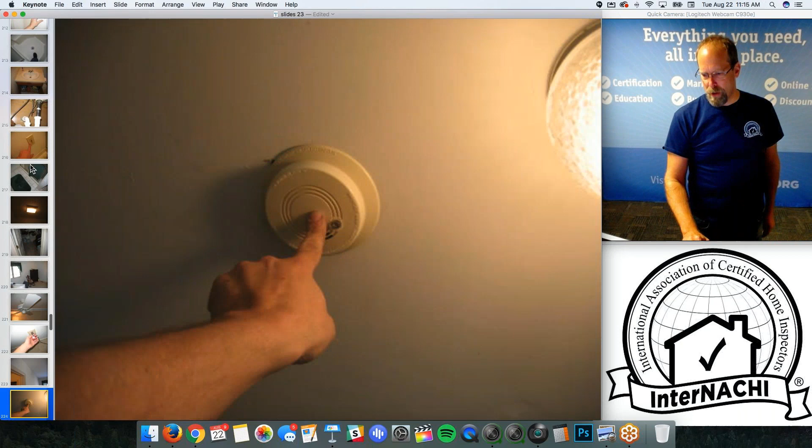Interior fans, receptacles, there was some patching of the drywall there. Any smoke detector that's yellow in color should be replaced with a battery backup.

Second floor laundry, wish I had one. If you do, the clothes washer should be resting in a pan, a catch pan, just in case it leaks, and they sometimes do, the gasket or whatever, especially on old units. And then that's the electric, that was to code back then.

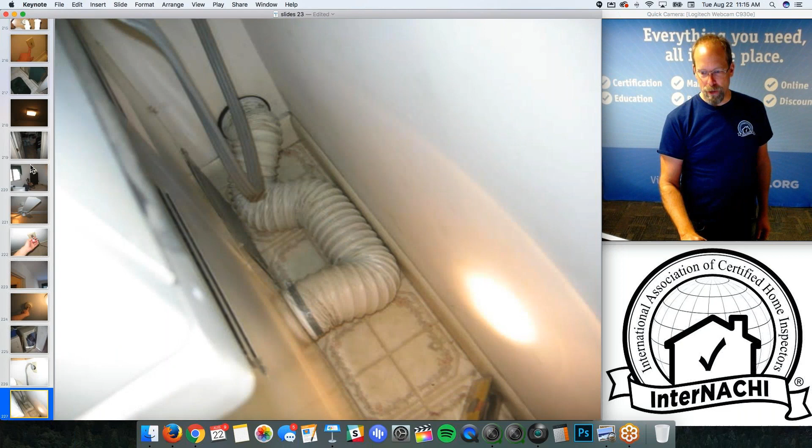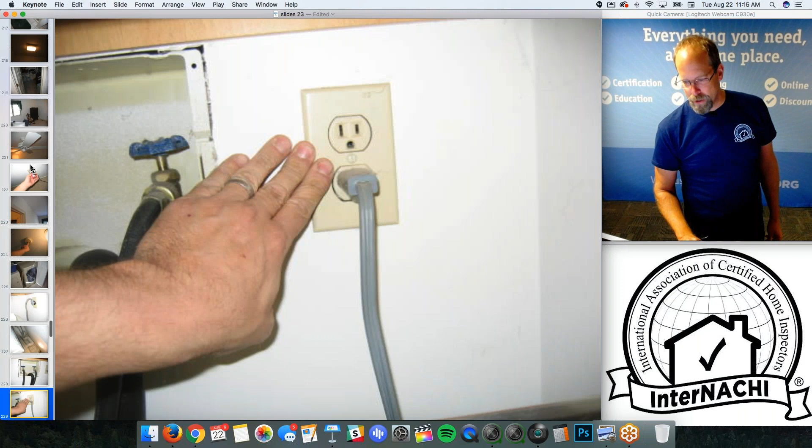Now it's 4-prong, remember? The dryer vent pipe is okay, but it's clogged or very dirty on the outside, so we want that cleaned. The pressure hoses should be pressure tested, braided mesh hoses. These are not, those are cheap ones. And there's the crack in the pan underneath the clothes washer.

Second bathroom, same as the first. Bathrooms take a couple minutes. There's a cat in the house. I want my client to know that.

So I take a picture. I couldn't find the cat, so I took a picture of the litter box in the bathroom. I want them to know that if they move into the house and the house is empty but smells like cat urine, I've informed them that I observed this indication of a pet. I have cats myself, I love dogs, I have dogs, so it's nothing against pets. I just want my client to know that was the condition of the home when I inspected it, and when they move in they may have a reason to replace all the carpets. I'm just saying.

Interior pictures, pretty easy. I love inspecting the ceiling beneath the second floor bathrooms. You shine your flashlight - Inspector Outlet has these high lumen flashlights. I like Inspector Outlet, that's the only place I'd recommend shopping. So if this was a ceiling, I put my flashlight up against it. This is a wall, you can do it for a wall too, shine it like that, and you can adjust these. It's easier to see defects in the ceiling below a bathroom if you do that, and if there was a leak or a patch it just pops right out, unless the plasterer was really good. So that's another tip.

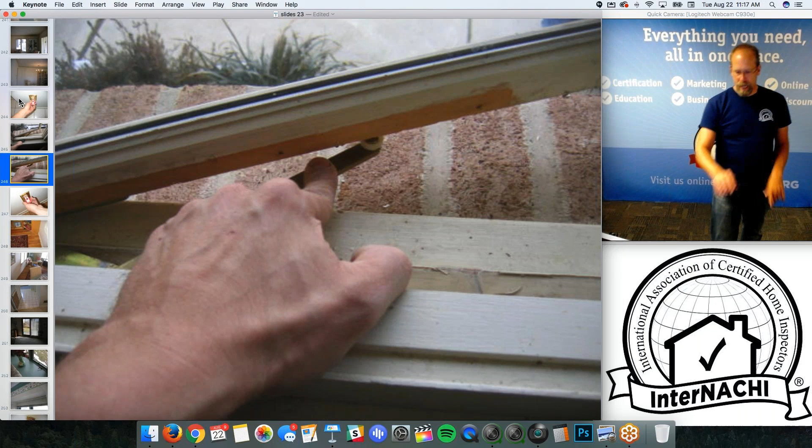Getting close to the end, right? You can feel it, I can just move through the house pretty fast. Another casement window with a detached mechanism, no big deal. This heating register, you can barely see it, it's underneath the floor, so I want to make sure every room has some conditioned air with a furnace system. I want to identify that the basement wasn't part of the original structure, so this basement is probably going to be cool in the wintertime, and that is a restriction of that register as well.

So there's interior surfaces. I love looking at bay windows - a bay window is a hole in the wall, so I inspect it like a door or any window. I tend to walk up and go bottom left, bottom right, top left - counterclockwise. Bottom left, I look at the bottom left corner of the door or window or bay window, bottom right, top left - just go around counterclockwise with everything I inspect, looking at the corners really.

And here's a door. Bottom left, bottom right has wood rot - stop, that's all I need to know. That's probably part of that water intrusion problem I saw in the basement, and I thought it was the deck flashing. It could be the deck flashing and or the door itself. So we've got lots of problems: water intrusion through structural components, missing flashing, wood damage, water all the way into the basement through the door.

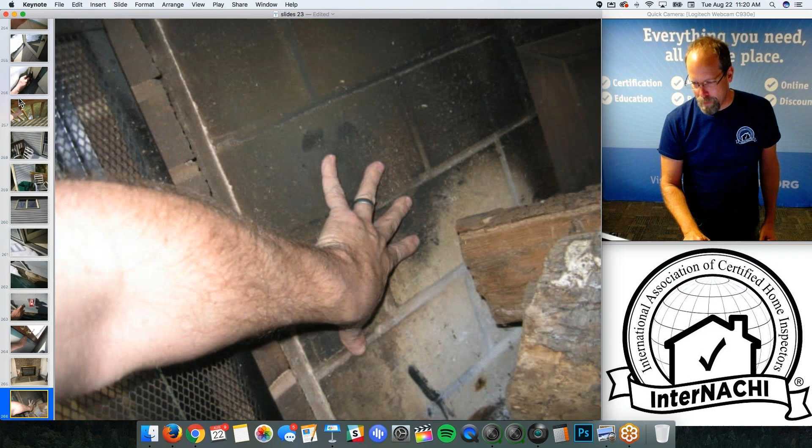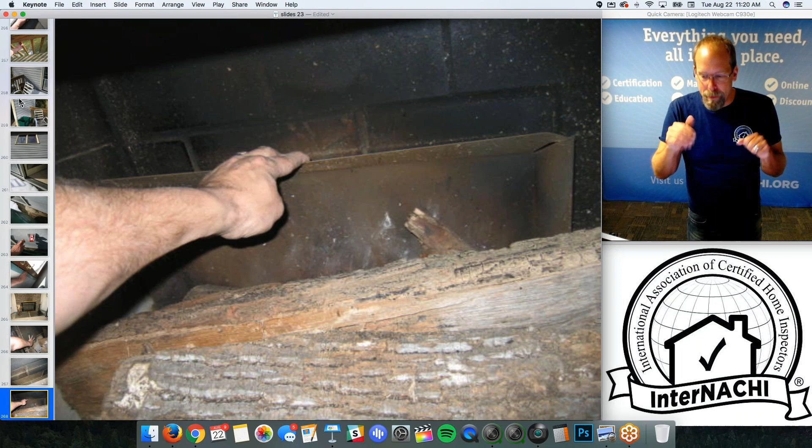There's the fireplace - remember on the roof I identified the fireplace flue, so there's a fireplace there. You're required, according to the standards of practice, to open and close the flue damper. I take a look at the masonry - this is a masonry unit, so I'm looking at the brick, the mortar joints, looking for any cracks. There's a shield to reflect heat back into the system, but if there's a shield and I can pull it back, I'm going to take a look behind there. I don't want any holes in the masonry of the firebox. The floor looks good, and there's the damper, the doors, the hearth, and the clearances.

Looking good, I'm in the kitchen now. This is easy - I turn on every appliance, shut them all off, even run a short cycle with the dishwasher. If it leaks, that's great - I didn't break anything, and if it leaks that's awesome, you found it, put it in the report. Garbage disposal turns off and on.

Receptacle, I don't like the trap. It's kind of like what do they call it, an incline P trap. So I don't want that.

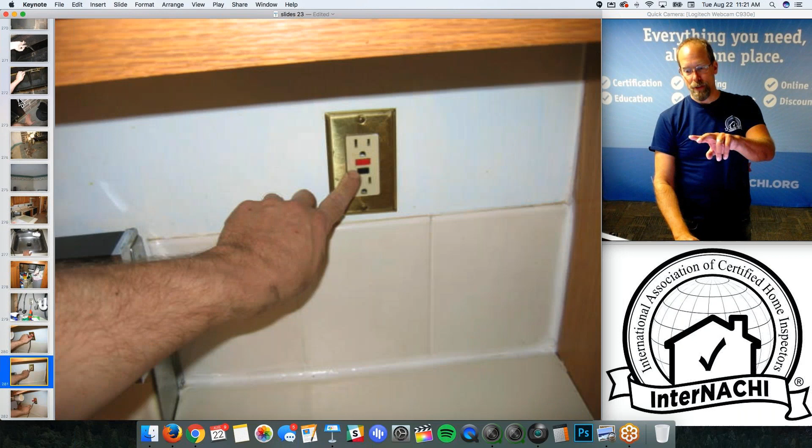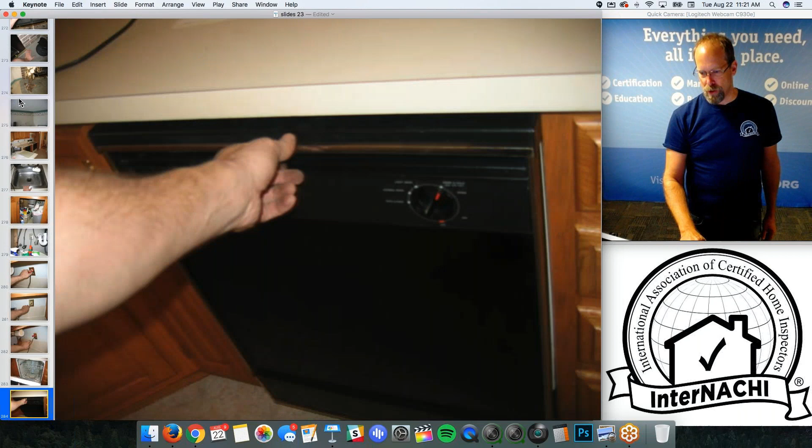GFCIs, that one doesn't work. So this one works, but that one doesn't, because I have my fingers crossed. Run the dishwasher interior, I open and close the drawers, and that's about it. Then I run a short cycle. The stove, oven element didn't turn on.

That's it. That's my home inspection for that house. Do we have any questions?

Gregory asks, do you prefer a checklist or narrative report? Narrative, but it doesn't matter to me, right? It really matters to your client. So nowadays your clients expect to read sentences in paragraph form with no spelling errors, good grammar, and pictures. They don't quite yet expect to see video, but I think that's going to be the new trend.

So what you can do is, if you're trying to decide whether you should do this or that in your service, you can always ask. Why don't you ask a couple past clients, do a little survey, follow up with them.

What I did was, a lot of my business came from real estate agents. So I wanted about 30 real estate agents for every home inspector in my business with good relationships, because that kind of filled up their calendar. Half of them closed every month on a house. So that was good business.

But I asked the real estate agent, why don't you just ask them, like, what do you expect from a really good home inspection? What do you need a home inspector to do during a home inspection day? So you just ask them, and whatever they say, provide it. So now you don't have to guess.